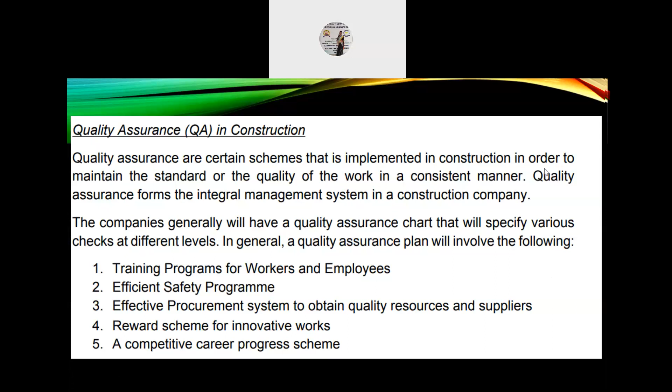First, training programs for workers and employees. Second, efficient safety program. Third, effective procurement system to obtain quality resources and suppliers. Fourth, reward scheme for innovative works. And fifth, a competitive career progress scheme.

In continuation, quality control in construction involves periodic inspection of the construction activities and facilities in order to meet the desired standardization as per the contract. Quality control is undergone by a team of QC, that is quality control engineers or specially trained teams. For example, the quality control for compaction work conducted for highway projects is performed by measuring the soil density. Slump test helps in determining the workability of the concrete.

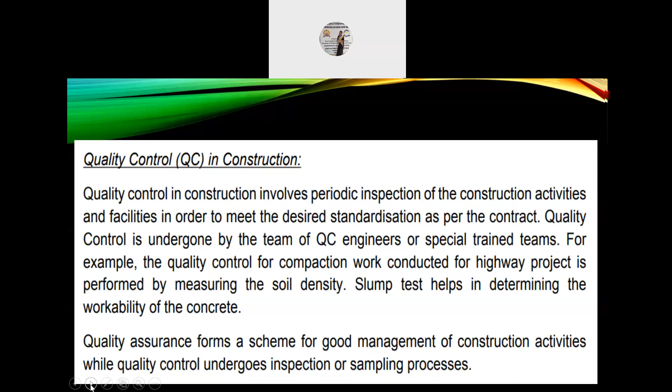Quality assurance forms a scheme for good management of construction activities, while quality control undergoes inspection or sampling processes.

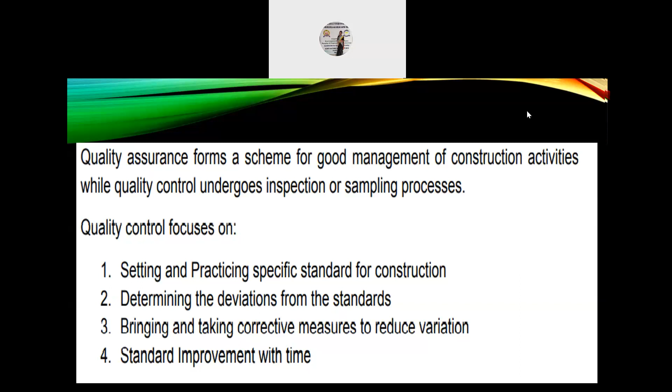Quality control focuses on the following: number one, setting and practicing specific standards for construction; number two, determining the deviations from the standards; number three, taking corrective measures to reduce variation; number four, standard improvement with time.

So the four pillars of construction project quality are meeting the technical specification, delivering on time, cost within the budget, and work without any argument or dispute. These factors reflect the good quality of the work done in a construction project.

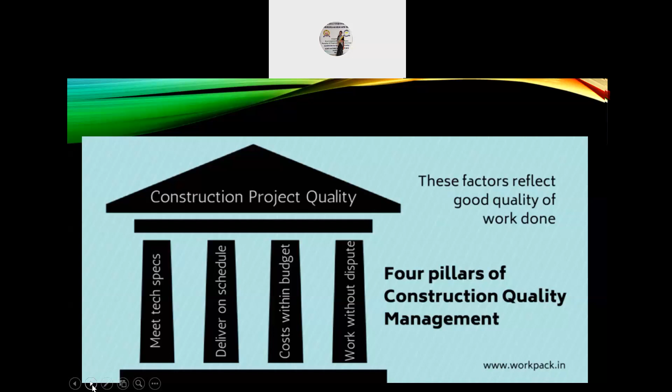Use of manuals and checklists for quality control. There are 5 elements of quality control checklist that are vital in making them effective. Some are more obvious to importers while others are often unknown or neglected. The 5 elements include product requirements, packaging requirements, on-site tests and checks, defect classification, and collaboration between the importer, supplier, and quality control staff.

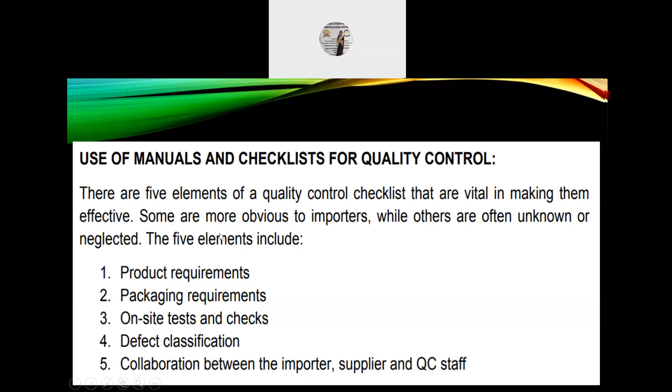Next, role of inspection. Inspection is one of the most important parts of quality control. Inspection involves measuring, examining, and testing products, processes, and services against specified requirements to determine conformity. An inspection determines if the material or item is in proper quantity and condition. If done properly, it helps to a great extent in ensuring proper control on quality of the materials and products.

A few common roles or responsibilities are: number 1, carry out quality assessment measures of all products ready to be shipped and incoming raw materials; number 2, take a thorough look at the plans, specifications, and blueprints to understand the product requirements; number 3, reject all incoming raw materials that fail to meet quality expectations and report the issue to the concerned department at the earliest.

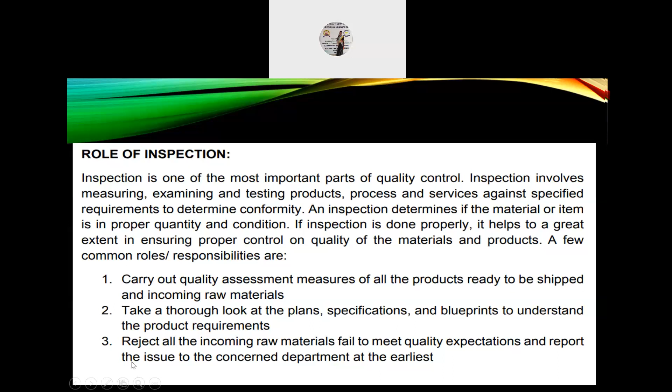Number 4, resolving quality related issues, adhering to deadlines. Number 5, providing training to the quality assurance team. Number 6, designing an efficient design protocol which can be used across all domains.

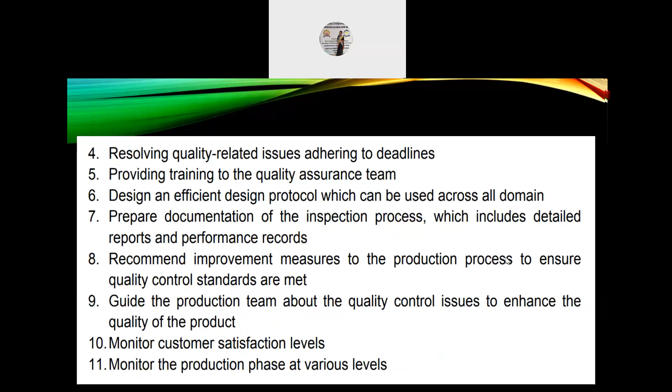Number 7, preparing documentation of the inspection process, which includes detailed reports and performance records. Number 8, recommend improvement measures to the production process to ensure quality control standards are met. Number 9, guide the production team about quality control issues to enhance the quality of the product. Number 10, monitor customer satisfaction levels. Number 11, monitor the production phase at various levels.

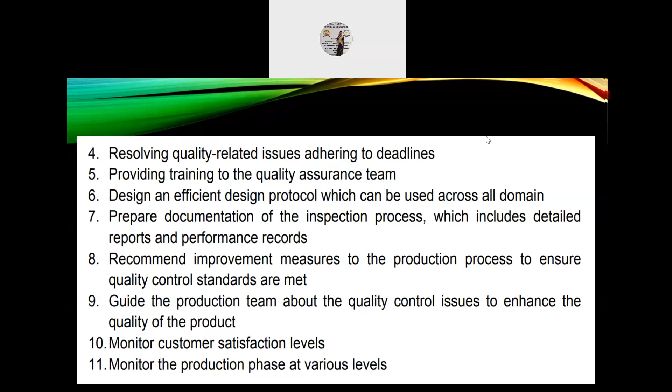Quality management is dependent on quality assurance, and both quality management and quality assurance as a whole are dependent on quality control. So together we can say that quality assurance and quality management comprise of quality control, which is QC.

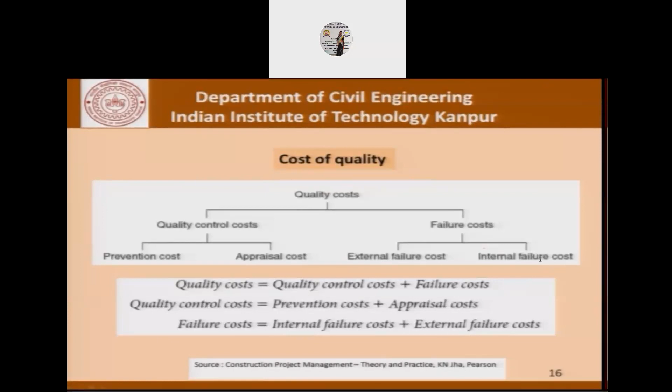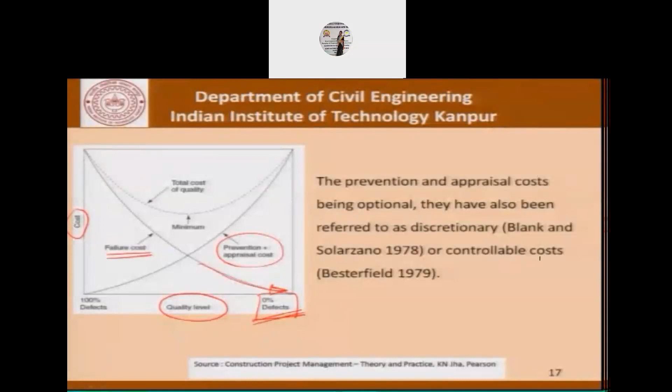Now it is up to us to decide what is the level of quality that we will keep, what is the level of quality that is acceptable to us, because there is a cost involved.

Now, in the discussion so far, we've already talked about construction safety. Do you see some parallels between construction safety and construction quality? At least I see several things which are quite in common.

When we talked of safety, we talked of prevention of accidents and the cost of safety, direct cost and indirect cost. Then also, there was the whole department of safety, a safety engineer, a safety audit team, and so on.

Those people were also involved in ensuring that the project site is a safe place to work, that is, there are few accidents. In fact, the target is zero accidents.

Now, in order to ensure that, there is a cost that is involved, and much like in the case of quality control, there will be quality inspectors, quality audits, quality reports, a feedback mechanism, and there have to be records.

Both quality and safety inspectors are not mainline execution people. They can be looked upon as people who hinder the progress. So a quality control inspector can well say that the product being made or the construction activity being carried out does not meet quality standards, does not meet acceptable standards, and therefore must be stopped.

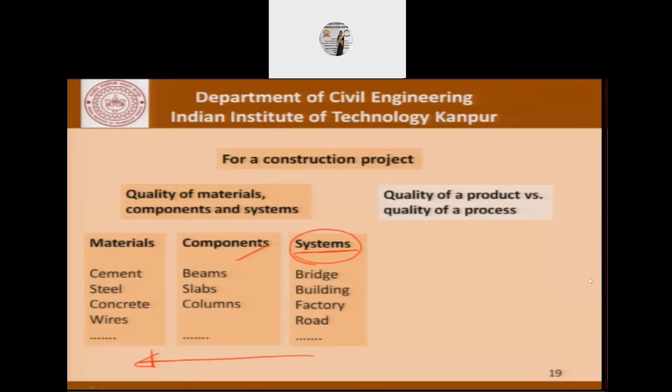Now, coming to products versus processes as far as construction industry is concerned, products could be sleepers, pipes, girders, and so on, which are largely factory-made products. So in this day and age, we are talking about prefabricated members. Now, no matter how much prefabrication we do, we will be able to make certain products, but finally they'll have to be integrated at site to develop a system.

We've often seen construction being done with precast girders. Now, those precast girders are factory-made products, but they have to be assembled, they have to be erected at site, and there's a lot of workmanship that goes on while they're at site in order to ensure that the bridge made with them meets the requirements.

Coming to processes, there are so many processes. There could be welding, compaction, transportation of concrete, and so on. The list is endless. Each of these processes has to meet certain requirements, only then will the products and components meet the requirements.

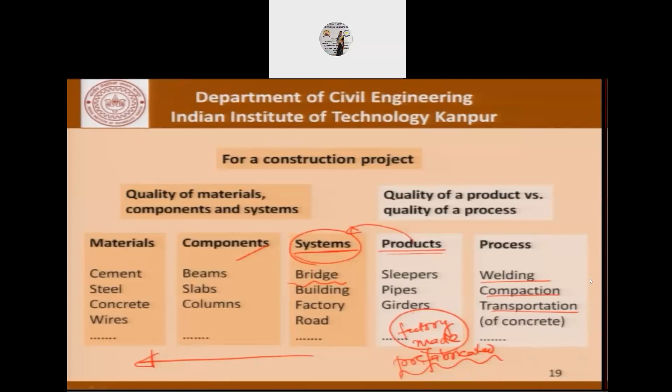So the whole gamut of our process as far as construction industry is concerned from the point of view of quality is a very complex situation, and it's important that we understand each and every detail of whatever small bit we are looking at. That will be the approach we adopt in this course. Now, the thought process for quality control is closely linked to standardized methods and specifications.

Test methods lay down a detailed procedure for almost all the steps involved in a test, especially for steps considered important from the point of view of results. We'll see this when we briefly talk about the parameters important for testing the strength of concrete today, and later on in greater detail.

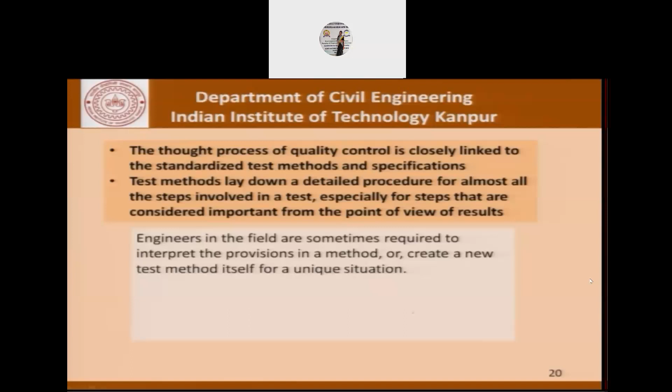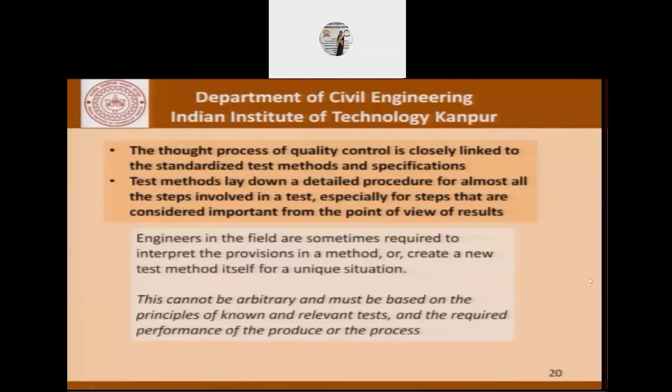Engineers in the field are sometimes required to interpret the provisions in a method or create a new test method for a unique situation. This adaptation or modification cannot be arbitrary and must be based on principles of known and relevant tests and the required performance of the product or process. We'll appreciate the import of these statements better when we look at some examples.

Now the purpose of these tests could be to ascertain the performance of a product or a process and determine its acceptability, or it could simply be to compare two products or processes.

Issues relating to quality control will be examined using case studies or taking up examples of simple processes from the field. The effort will be to carry out exercises that help in understanding the issues involved and how they are addressed in a quality assurance, quality control framework.

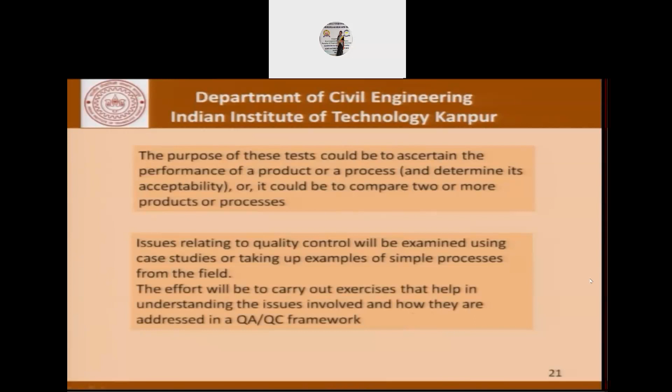So the discussion in this course is not so much about the provisions that exist, but what considerations must prevail or may have prevailed when we introduced those provisions in a particular test method or specification.

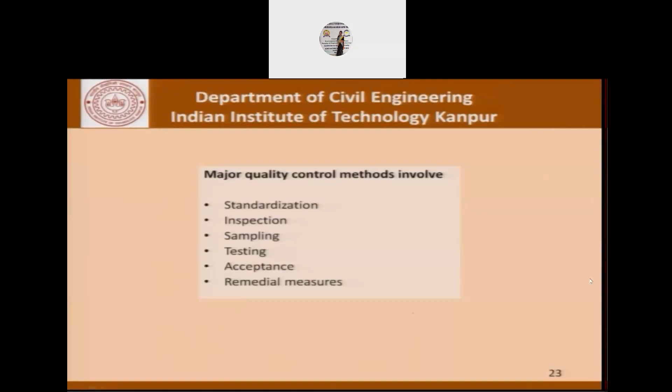Now, to recapitulate, major quality control methods involve standardization, inspection, sampling, testing, acceptance, and remedial measures in the event that acceptance criteria is not readily met. These are things which should be addressed in our procedures, and only then we'll be able to talk about a proper quality control, quality assurance program, and also have fewer disputes. That's something we'll talk about later.

We'll take up and discuss some specific issues from the construction industry and look at it from the quality perspective. Some of the things I've identified to take up as case studies are welding works, epoxy coated bars, grouts and grouting, concrete pipeline using couplers for reinforcement in reinforced concrete construction, and precast products.

The last three, given in brackets, we will take up later on, or possibly I'll just upload this material on the website for you to go through on your own. The first four parts is something we will talk about as we move along in this course.

Now we will look at this from the point of view of quality of materials, components, and systems that we talked about, and the quality of product versus the quality of a process. Can we look at these seven things in the framework suggested: quality of materials, components and systems, and quality of product and quality of process?

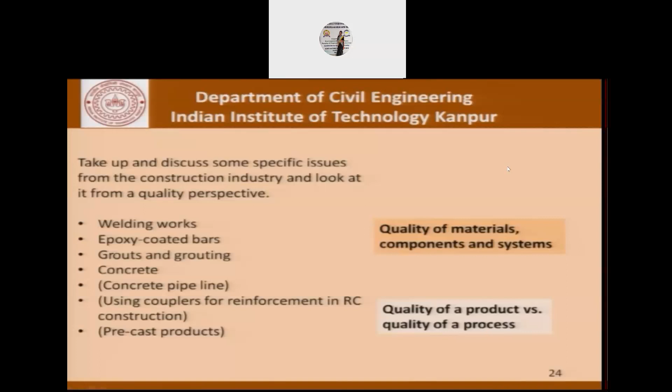Now, if we look at it that way, as far as the quality of materials, components, and systems is concerned, these items fall in that category. Epoxy coated bars is a material, grouts is a material, but grouting is a process. Concrete is a material and concreting is a process. Concrete pipeline is a system. Using couplers for reinforcement in RC construction is also a material. Couplers themselves are basically a kind of material that we use at the construction site.

Looking at the other side, welding is basically a process. Grouting is a process. Concreting is a process. Using couplers is a process. But precast products and the kind of considerations that go into quality control of precast products is basically a matter of quality of a product.

So this is how we are going to divide our discussion. We are going to focus on bits and pieces of the construction site to better understand the issues involved in quality control and quality assurance when it comes to a construction project site.

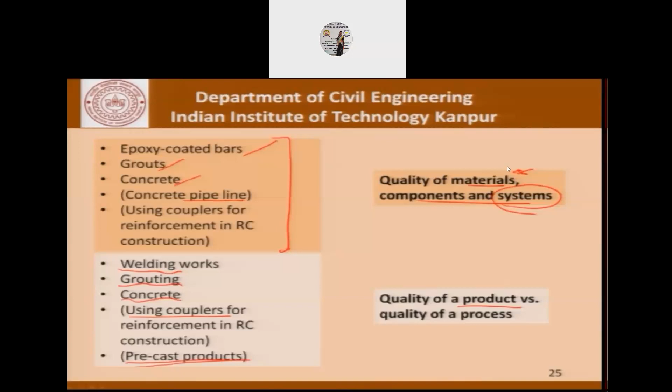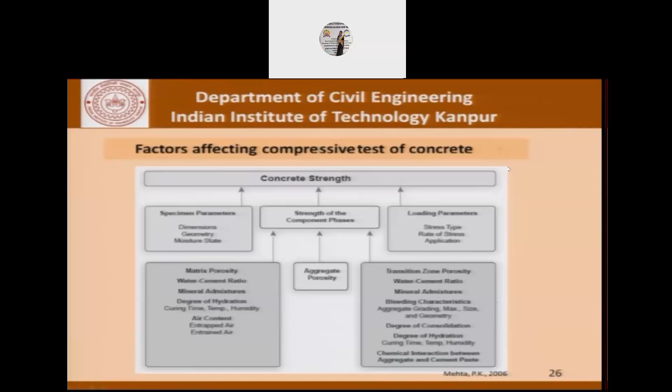It could also be transition zone porosity, water cement ratio, and similar factors. And then there are loading parameters, such as stress type and rate of stress application. What I'm trying to say is that even a simple thing like the compressive strength of concrete has so many small bits and pieces, considerations, and factors that go into determining that strength. If one of these parameters changes, everything changes. It's important to understand this from a quality control point of view, because of the possibility of any of these parameters being scrutinized if it comes to rejection of products.

We'll continue our discussion today and look at another simple issue in concrete construction: lapping or splicing of reinforced concrete bars in RC construction. Steel bars used in reinforcement in civil structures are generally available in lengths of about 12 meters. However, structures of height or span greater than 12 meters need reinforcement bars connected with each other, and this connection has to ensure that stresses—whether tensile, shear, or whatever—carried by one bar are transferred to the next.

So if we have a situation where we have a bar here and bring another bar here, and put concrete around it, and this bar is pulled out or subjected to tension, there's no way the whole joint or member is going to behave the way it's designed to. So to ensure that, we have a mechanism for stress transfer, and one way is to have a lap. The whole joint gets buried in concrete, and whatever forces are acting on the steel are transferred from one bar to another through this lap.

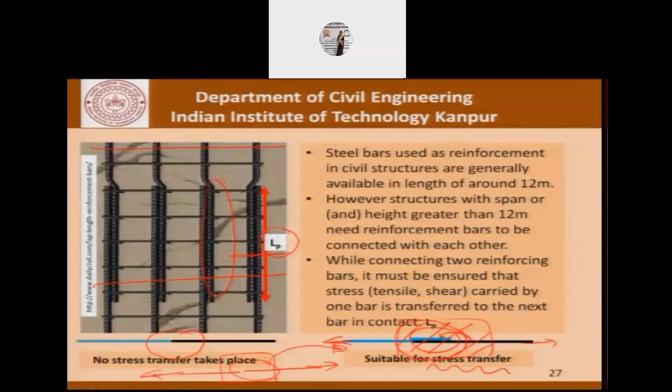That's one problem. The second problem is that this lap length is actually material being wasted—material which can be avoided if possible. As far as economy is concerned, one consideration could be: can we get rid of this lap length, or can we reduce it? There are different ways which have been tried at site to address this.

Now, why we are getting into this discussion in this course is because of quality control issues. For the structure to perform satisfactorily, it has to be ensured that all these laps are proper—meaning the stresses in one part of the bar are appropriately transferred to the other part. With that performance criteria in mind, lapping is just one way of doing it. Checking the lap length is just one of the ways to ensure proper stress transfer.

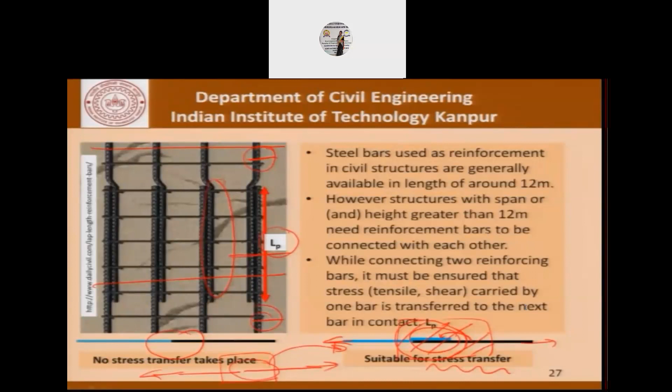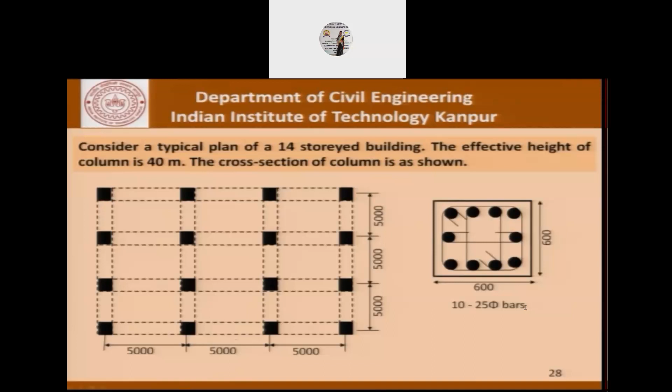Let's try to see the implications of this kind of splicing. Consider a typical plan of a 14-story building, giving an effective column height of 40 meters. If the column cross section is 600 by 600 with 10 bars of 25mm diameter, and we have 16 columns in this plan, we find we have to provide a certain lap length for each reinforcing bar. A simple calculation: the length of bars obtained from the market is, let's say, 12 meters.

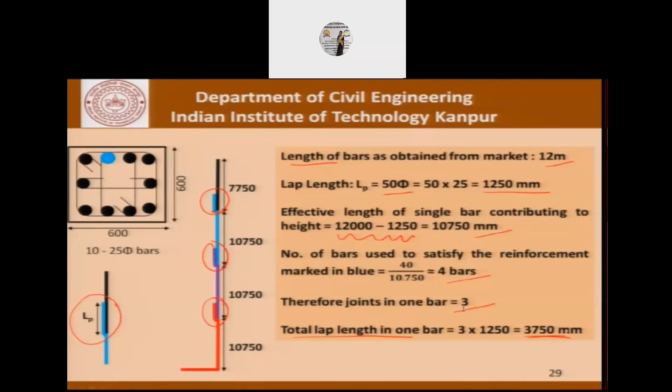In a height of 40 meters, we are using 3.75 meters of lap length, which is avoidable perhaps, provided performance is not compromised. Continuing this simple calculation, the lap length for 10 bars in a single column is 37.5 meters. If we take the weight per meter of a 25mm bar to be 3.85 kgs a meter, we are wasting or using 144.38 kgs in a single column.

Taking the rate of steel to be, let's say, 44 rupees a kg, the amount used in splicing per column is as much as 6,352 rupees. Now this for 16 columns is going to cost us 100,000 rupees.

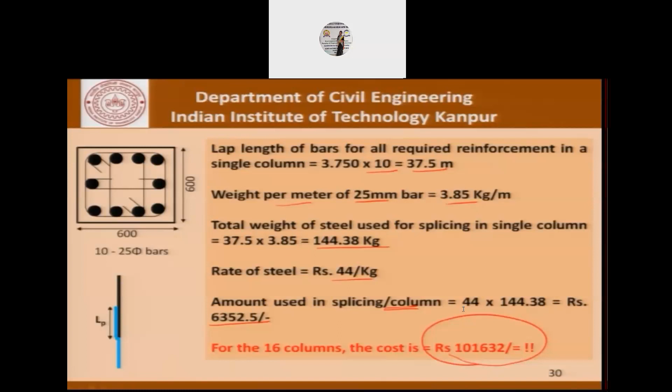This is the kind of back-of-the-envelope calculation which tells us that there is reason to study this issue a little bit and try to find out what are the alternatives.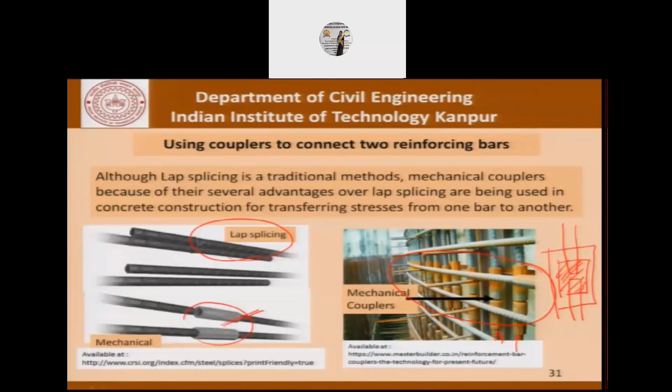Without going into the details of the mechanical coupler and how they are fixed, which becomes a completely different discussion, from a quality control perspective it is important to ensure that this coupler or joint in the reinforcing bar, using couplers in all the bars, performs in a manner that there is no compromise on the performance of the structure or the steel bars.

This is another view of couplers being placed at site, and we can see that once we decide to use couplers, there'll be hundreds of such couplers being used at a construction site. And that takes us to this issue of quality control.

How do we ensure that the couplers being used at site are of a certain quality? How do we ensure that the bars are being properly embedded? This picture here also tells us what will be the kind of congestion of the bars if we were not using couplers and were using the regular splices.

We must remember that the diameter of the bars plays a very important role when it comes to deciding whether or not we should use couplers or look into the possibility of alternatives to splicing.

In a previous figure, we had seen that when doing a splice, the bar needs to be bent the way it is shown here. Bending this bar to this extent or in this fashion is not easy when it comes to large diameter bars. For smaller diameter bars, yes, it is possible. But for large diameter bars, it's a very difficult proposition.

Therefore, the whole manual exercise or even a mechanical exercise of bending the bars to this shape adds to the cost of splicing, which we did not account for when we talked about that 100,000 rupees, which is just an indicative, illustrative number.

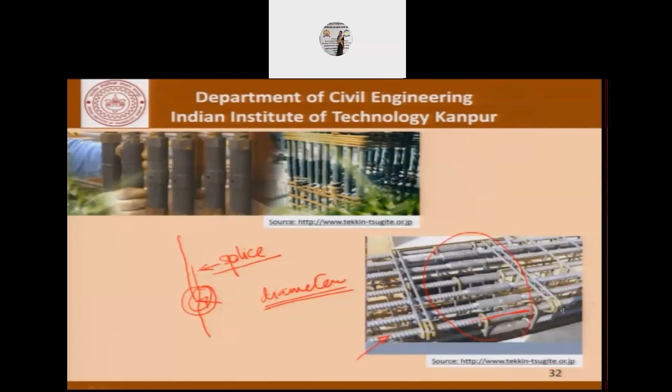The picture also gives us a slightly different view on quality control, and that is that this procedure to ensure the couplers are good, the coupling is good, has to be ensured right across all the thousands of bars which are used. Therefore, it's very important that the person actually engaged in that job is conscious of the responsibility on his shoulders to do a good job.

We must remember that as far as reinforcement is concerned, it is actually going to get embedded in concrete, and it will be very difficult to do anything after the concrete has been cast. It's equally difficult to ensure that each of these reinforcing bars will be inspected before the casting is done. Of course, in certain very critical structures, it may be ensured - there may be a procedure that will take that into account. But most of the time, it would be simply impossible to do that.

And that's the importance of quality control - that's the importance of educating people to do a good job. Now we move forward and try to look at another possibility, that is joining.